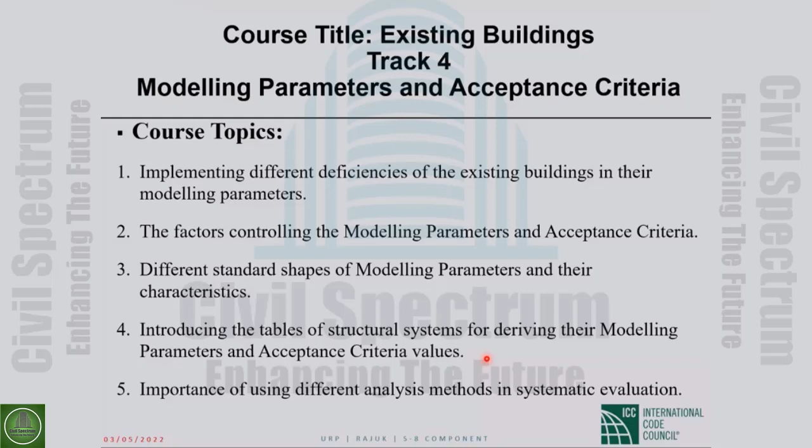Look at this systematic existing building code: performance levels, a chapter on the definition of hazard levels, a chapter on different analysis methods - linear method, nonlinear method - and then they have some chapters on different materials. So all the information regarding the different systems made from that material is usually very nicely summarized in the chapters related to that material.

For example, for concrete - and the same for almost all materials - we have the scope at the beginning, material properties and condition assessment second, and general assumptions and requirements third. So these three are general things.

And then we go to the systems, which is, for example, here, concrete moment frame is a system, precast concrete frame is a system, concrete frames with infills are a system, concrete structural walls and precast concrete structural walls, concrete braced frames, and then some elements: cast-in-place concrete diaphragms, precast concrete diaphragms, and concrete foundations.

Therefore, as a sample, we look at the structure of the concrete section. In the first part, the scope part, it naturally tells us some general statements about the area covered by this section, by this chapter. For example, it cautions us that this chapter is not for reinforced concrete buildings damaged in an earthquake - it's for existing buildings that have not experienced, or have very small, not lots of, damage from earthquake.

If we want to evaluate a damaged building, the procedure should be somehow different. So in scope, it emphasizes under what conditions we can use the requirements of this chapter for our existing building.

Then the second part in each chapter is material properties and condition assessment, which is really the most important, the most difficult, the most time-consuming part in each retrofitting and evaluation project. It's finding the material properties and condition assessment of the building to determine the configuration of the elements and materials. That's naturally very time-consuming, needing lots of permission, lots of arrangements.

After this second part, one of the most important parts of this is the test, especially material testing, in buildings. Many property managers don't let you do the test because it just damages their property. So the existing building codes sometimes let you use the information in the existing drawings or documents. In many existing building codes, there are also default values, so whenever you can use that option of not doing the test, you can use those values. But the only point is...

In systematic evaluation of buildings, we need two numbers for the strength of the material, F prime C, Fy. We need two numbers: one is the expected value, one is the lower bound. When we want to use material properties to calculate the strength of force-controlled elements, we are a little conservative, so we use the lower bound. When calculating the strength of deformation-controlled forces, because it's less scary, we use the expected value, the mean value. Lower bound is mean minus one standard deviation.

Therefore, because sometimes the codes let us use the values in existing drawings or documents, they should give us a factor so we can use those numbers as lower bound and increase them by this factor to get the expected values. So, for example, for concrete compressive strength, if they let us use the value in the documents as a lower bound, multiplying by 1.5 becomes the expected value.

So, finding the condition, finding the configuration, finding the dimensions of elements are very important. Material is very important, but also the condition, configuration, and dimensions of elements are very important too, because otherwise we are not sure that the computer model we have is correct. Therefore it's important that we check the dimensions of the beams, columns, the condition and the dimensions of the elements.

The condition check usually covers whether the concrete is good or not, and using non-destructive testing to find the location of the reinforcement, especially if we have some drawings, we can cross-check this with checking in the site, with non-destructive checking in the site. And if some of the points where non-destructive testing is done are insufficient, then we uncover the element and see if the accuracy of the work is good enough or not.

Usually on site, the importance of an experienced operator, his experience or her experience, is much more important than the equipment they are using. Sometimes you see that an experienced operator with old equipment does very good estimation, but sometimes a less experienced operator with very nice up-to-date equipment gives you wrong information. So checking them by uncovering some places is very important.

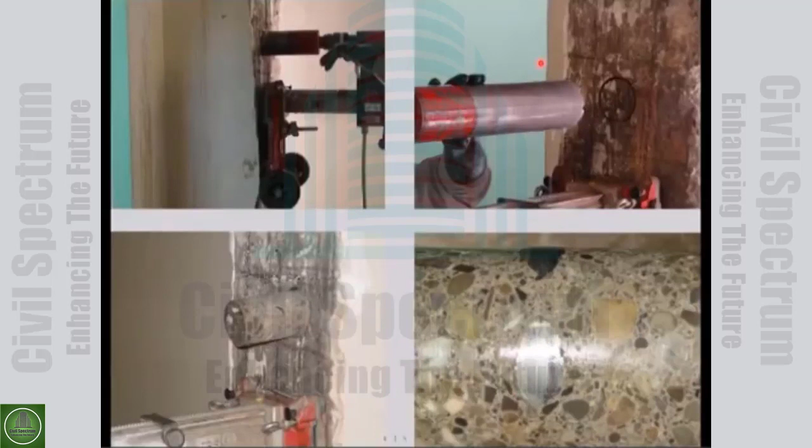If, for example, the equipment is vibrating, or the cutter blade is not sharp enough, the sample gets lots of small cracks that are not visible. When we test this, we get lower values for the concrete, and we use these lower values in our structural and building model, and the building becomes vulnerable—which maybe it isn't, because the way we derived the material properties was not good, and the real strength is much more than what we get after all this effort and permission arrangement. Then the result is misleading instead of helping us give a good estimation of the building's condition.

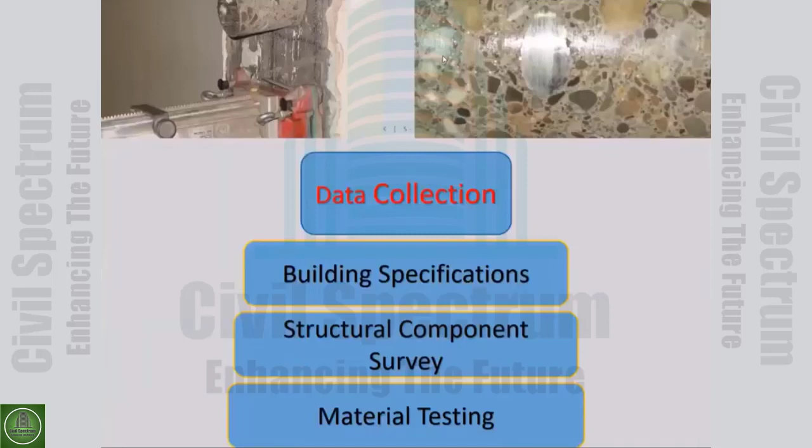So we should be very careful to do these procedures carefully and get good results. Otherwise, it's just a waste of time and money. Usually we pass over data collection very quickly, but in reality data collection is the most difficult and most time-consuming part of a systematic evaluation.

What is the configuration of the building? What irregularities does it have? What are the dimensions of the buildings and of the elements? What is the condition of the elements? What are the soil properties? Gathering this information is the most important thing, and is the most valuable contribution our engineers can make for the buildings.

Because right now we are supervising construction, we are designing buildings, so we should make sure that the end results, the drawings, reflect all the changes that go into the construction. The drawings should really be as-built drawings.

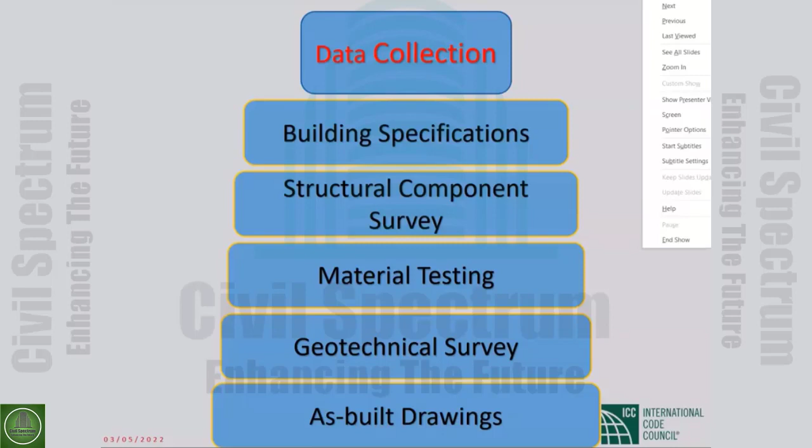And when we did all this, based on that table that I showed, we will find out the value of the knowledge factor. The knowledge factor value will be applied only to the existing material properties, not to the new materials. So when we evaluate a building, if we add some elements during the retrofitting stage, those are new material, and the original material in the elements of the building is the existing material.

When we model the building, the original building plus the elements that are newly added, we should remember that kappa, the knowledge factor, will be applied based on whether we use nonlinear or linear procedures for the strength or deformation capacity of the existing material.

For example, in linear procedures, we're dealing with forces. Even in the deformation control, the linear method can give us the deformation, the plastic deformation.

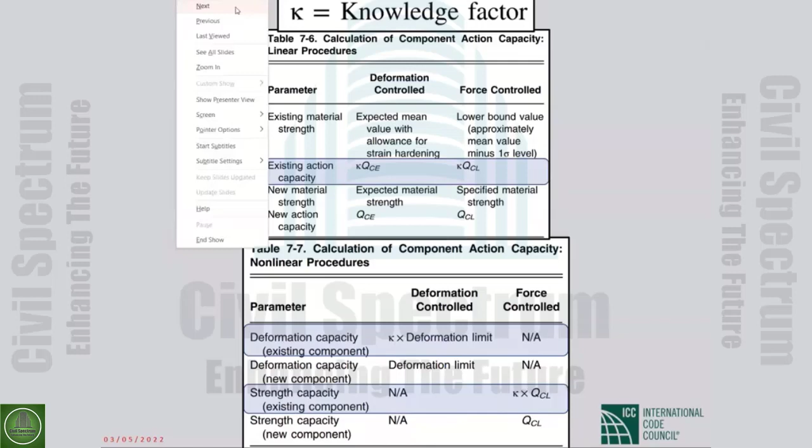Therefore, we are looking at the structure of the concrete chapter. In scope, it tells us when we can use the requirements in this chapter—it's not for damaged buildings, it's for existing buildings.

Part 2 is the most important part. We quickly pass through it, but in reality, in the project, it is the most important part. Then the last part is the general requirements, because after these general requirements, we go to the systems and to the elements.

In the last part of the general requirements, we are looking at some requirements that can be used in most of the systems and most of the elements. So we bring them out and talk about them once, to reduce the number of repetitions.

For example, the table for effective stiffness—because concrete elements, even in their linear range, get cracked and their stiffness changes. So we use effective stiffness. We don't assume that this part is nonlinear.

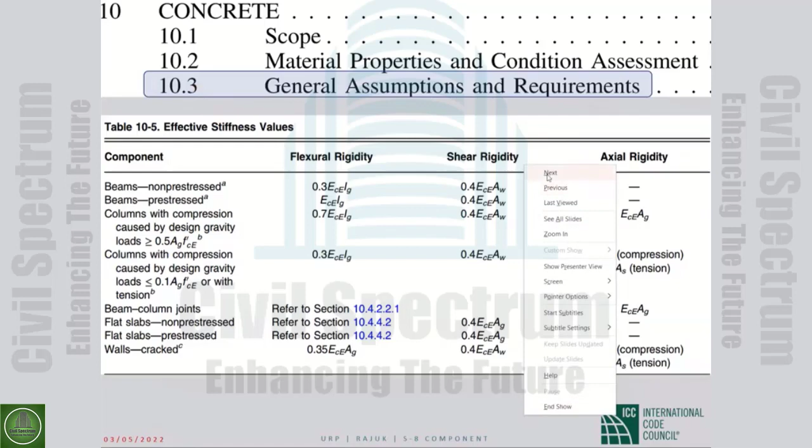Another very important thing given here is the effect of deficiencies, which is one of the most important things in this general assumptions and requirements section—some of the deficiencies, and how we should model them.

In a new building, if the hook bars, lap splice bars, or straight bars don't meet the development requirements, they should be demolished, and we should make a good element with good straight bars, hook bars, and lap splices that do meet the code requirements.

But for existing buildings, all of them have problems. We should model them—we should bring them into the modeling. A few locations we consider, for example, this deficiency: when in our existing buildings the straight bars' lap splice is not enough, or their hook bars are not, for example, the shape that is needed.

So what we should do, for example, is modify the yield reinforcement. If instead of this amount of development length you have a lesser development length, we use this ratio, not linearly. In the first version of this code it was linear, but later with more data they modified it with this type of equation. So based on what we have versus what we should have, how far we are from the optimum approach, we reduce the value of the yield.

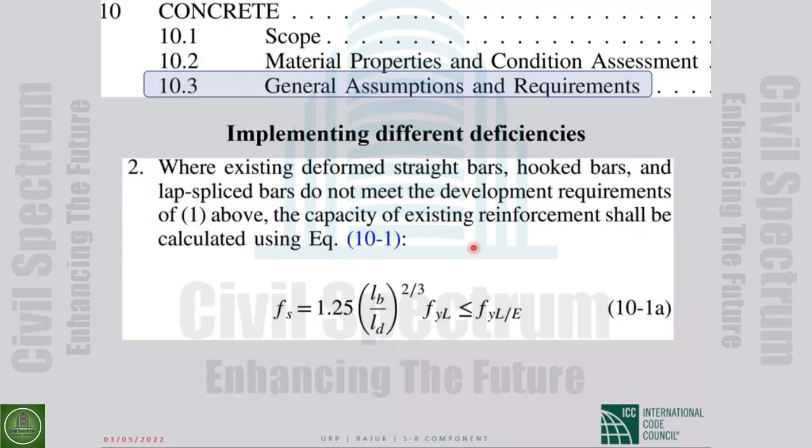So in the general assumption and requirement of the material sections, they teach us how to include this deficiency, specific material issues, how to include them in the modeling. This effect, we will see later in the tables, for example beams controlled by inadequate development or splicing.

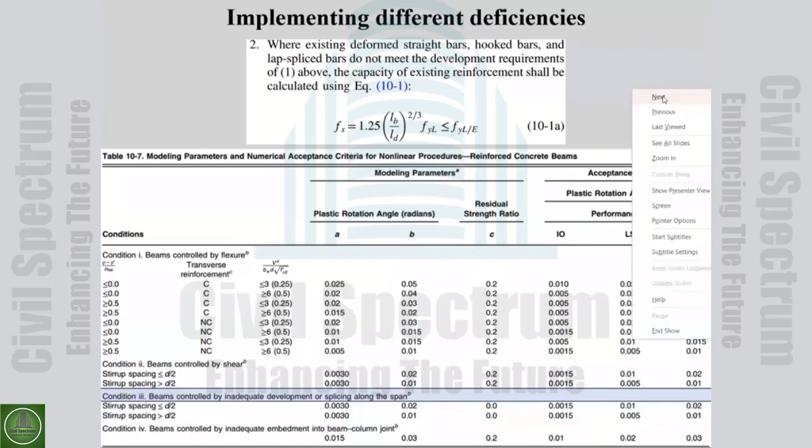What else do we have in this part related to deficiency? Still we are in 10.3, general assumption and requirement. In that part I've selected a few topics to give you general information that is provided there. They try to give us some means, some tools to differentiate between critical and less critical parameters.

As I said, we are in the comprehensive evaluation, and we want our approach to become complex. We are introducing new indices, so we want to differentiate between two points, because if we assume these two are the same, we should use the lower value for both, and that becomes our estimate. We want to, as much as possible, differentiate: make it difficult, make the retrofitting cheaper, make the modeling and analysis difficult for the structural engineer dealing with seismic retrofitting, but make the cost of retrofitting and disturbance of applying retrofitting as small as possible.

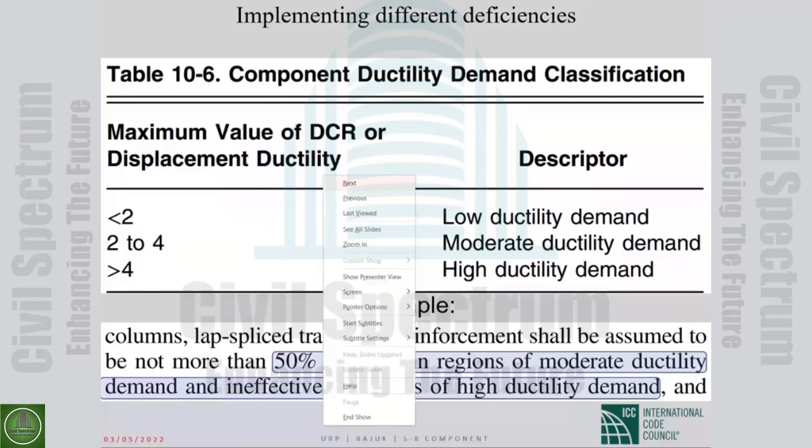What else? So we have some general items at the beginning, like scope, material, general assumptions—very important. Then we have systems, and then we have elements. For systems and elements, our approach is the same if we look at all of them and divide the situation.

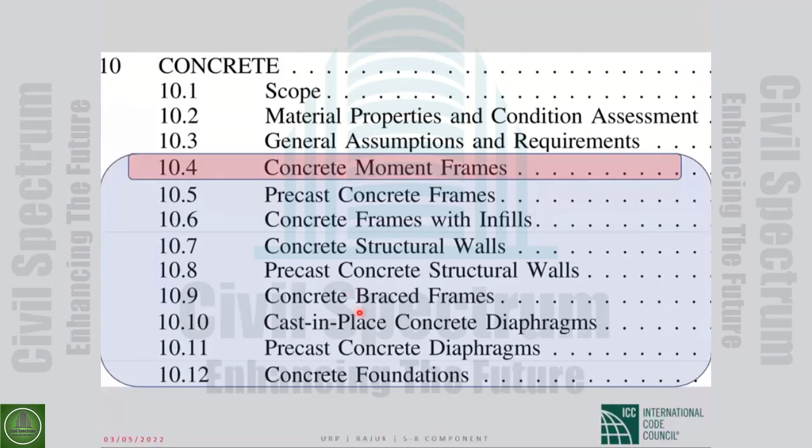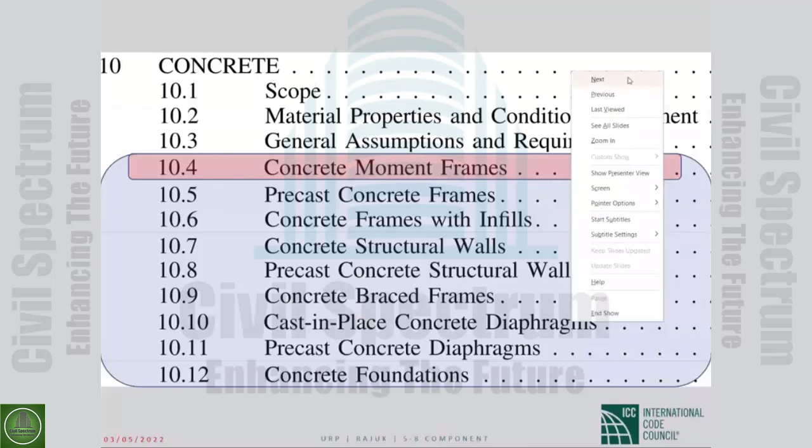For example, look at section 10.4, concrete moment frames. If you look more carefully, this section has subsections. For concrete moment frames, as one of those many systems, the material is very systematically distributed across these sections. There's one section that shows the types of concrete moment frames.

For example, reinforced concrete beam column moment frames—usually we consider these as moment frames with beam and column. But sometimes there is no beam, just a slab-column moment frame. And sometimes the beam is post-tensioned or pre-tensioned, giving us post-tension concrete beam column moment frames. So these are the three: reinforced concrete beam column moment frame, post-tension concrete beam column moment frame, and slab column moment frame.

Each of the systems or elements—for example reinforced concrete beam column moment frame—always has 5 categories of information in this seismic existing building code. You can always find 5, but one of them is very important; the others are not as important. So we have 5 pieces of information.

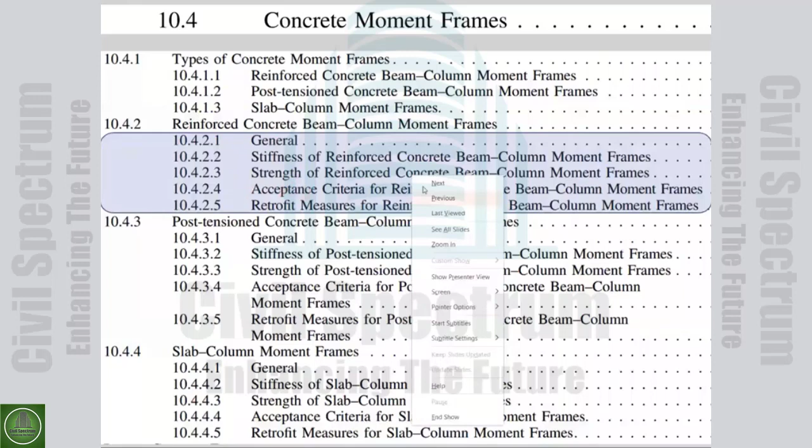And as I mentioned, the title of today's presentation highlights the most important part: the acceptance criteria and modeling parameters. For example, here—you've seen this table many times—it gives you everything needed for modeling and acceptance.

So powerful is this tool that now, as I mentioned, many structural engineers say that we don't need any new design code anymore. We go and build whatever we want, whatever we can. If there are some deficiency, we model it, and then we show that it passes those performance levels. But there is strong resistance to that.

Because the experienced generation of code writers believe that we can miss many things in modeling, in calculation of the level of loads, in calculation of the behavior. There are some unreliabilities, so it's better that we use the experience, use the prescriptive approach, keep the prescriptive articles in the code, keep the empirical approaches, try to use them as much as possible, but complement them with these. So most probably we will still have our prescriptive articles in the code, at least for a while.

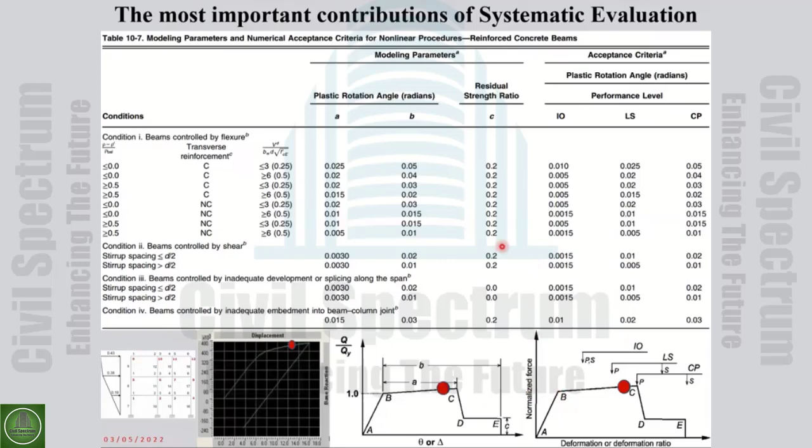Then applying this in the software becomes very easy. Usually the software asks us, what are your deformation control elements? We say it's a frame, so the beams and columns can get damaged. Or it's a bracing system, so the axial force in the braces can damage the fuse - the deformation control is the braces. Or it's an eccentric brace system, so the shear in the link beam is the deformation control parameter. So we select the kind of points that our software should look at for damage at that point.

So we select the templates, this is a moment resisting frame. In the beams, at the end of the beams is a location that can get damaged. We look at the deformation capacity and give the property of that spring, that nonlinear behavior at the end of the beam, which is the modeling property.

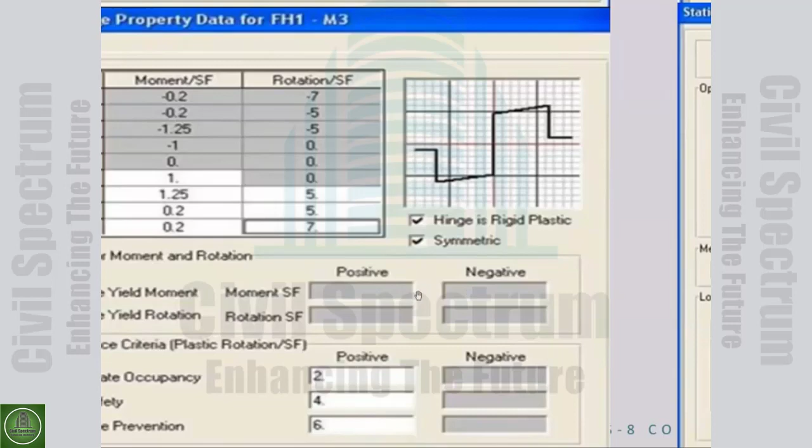So then in modeling, either we trust the software or we check and change the properties to be sure it applies according to our tables. Then we say that we want this building to be pushed to this target displacement with this lateral load distribution, with this many steps. If there was some problem in convergence, we increase the number of steps so the numerical stability can be guaranteed.

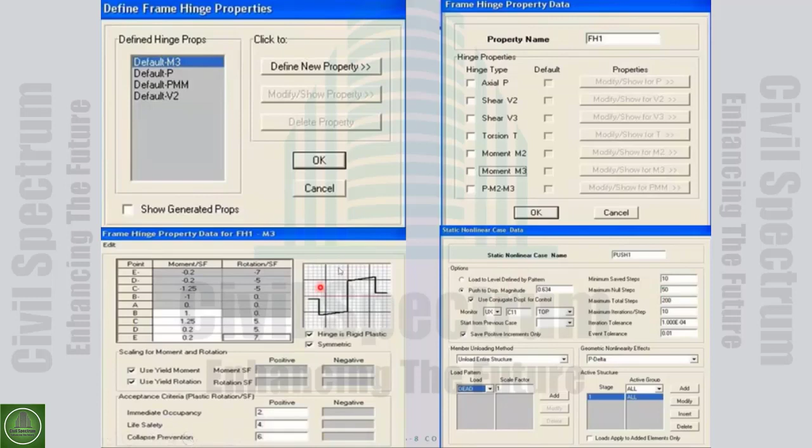As we saw, the software tries to push the building to that target displacement that you assign. In each step, it gives us the situation of all the deformation control parameters: how many of them are in the linear range, how many pass a little into the nonlinear range, past point B but still not in the IO range, how many are in this range.

At each stage, each target displacement is more, but for each displacement we can calculate what SA is that makes this much displacement, and we can say this corresponds to a 100-year return period earthquake. This is 200, this is 300, this is 400. And we see, as the level of earthquake increases, how the damage is distributed among the deformation control parameters in the building.

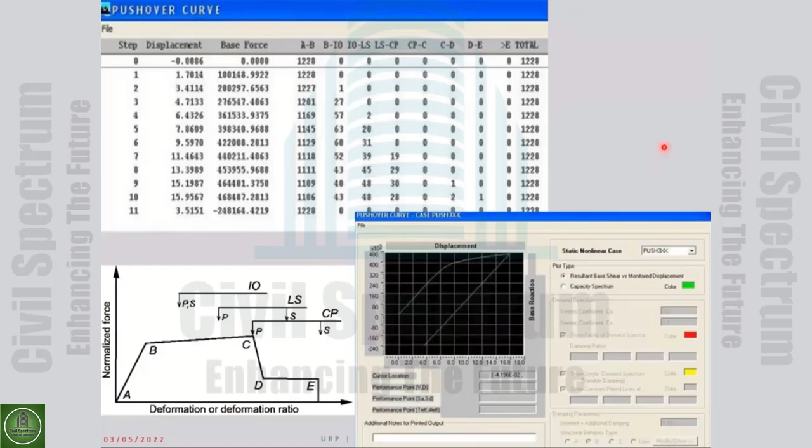So, these softwares provide a very good visual view of our design, so that the distribution of damages along the different bays and different stories can be seen very easily over here.

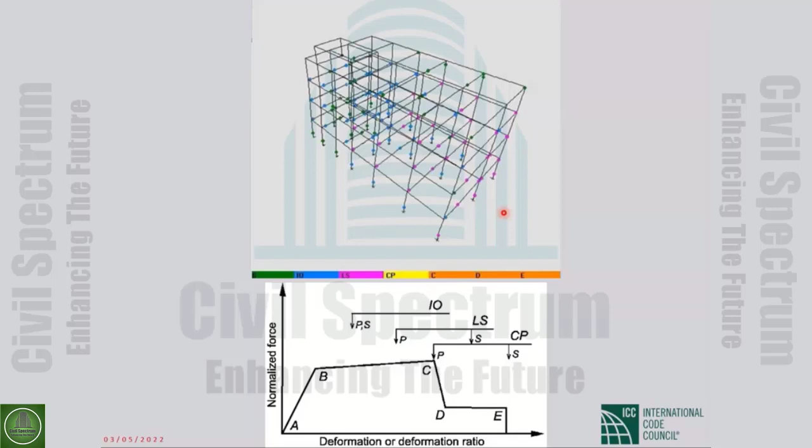Now, if we want to apply this in real life buildings, if one as a structural engineer wants to perform systematic evaluation on a building - because even in design of new buildings there are different approaches we can use, but the principles for existing buildings are a little different from new buildings - to make my point I try to find the simplest possible example. We have different methods for analysis: linear static, linear dynamic, nonlinear static, nonlinear dynamic.

So at least we have 4 types of analysis. Usually in new buildings, when we design, we shouldn't expect that much difference between these, because we scale. If we use one approach or another, there are some scaling changes, so they are not much different. But in the evaluation of an existing building, that's very critical.

So I want to reach this point: for systematic evaluation there are lots of ways to evaluate a building, but our view for selecting a company or person to do the seismic evaluation should be quite different from how we select a company or person to do a design for a new building. Usually in new building design, we select a person or company that asks for less money, because the procedure to be followed is almost straightforward, the steps are easier. But for the existing building it's quite different.

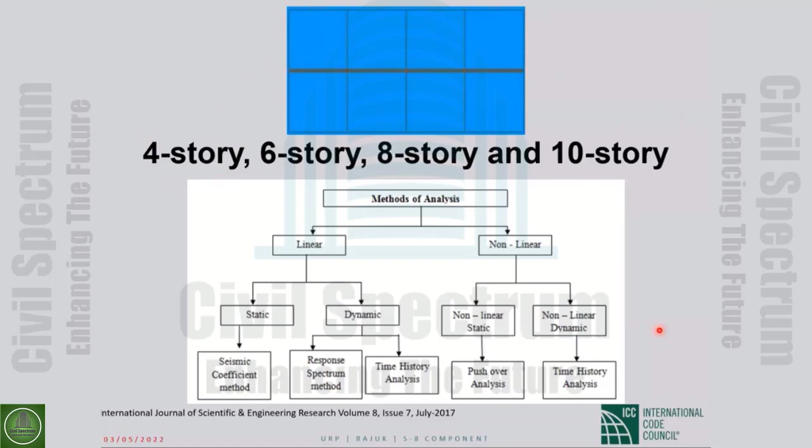Many times results like this that we solve from this example show beams and columns, number of elements in need of retrofit. We use a method, and this method says 50% of the beams need retrofit, half of the beams. We change the method, it says 25%. We change the method, it's 0. 50%, 0.

So the first lesson that we learn is that in seismic retrofitting for a specific building, if you apply the seismic retrofitting for a group of buildings, you should make a methodology and use that for all the buildings. But for one specific building, you should try all the available analysis methods, because one of them tells you that 50% of the beams need retrofitting, one says 0.

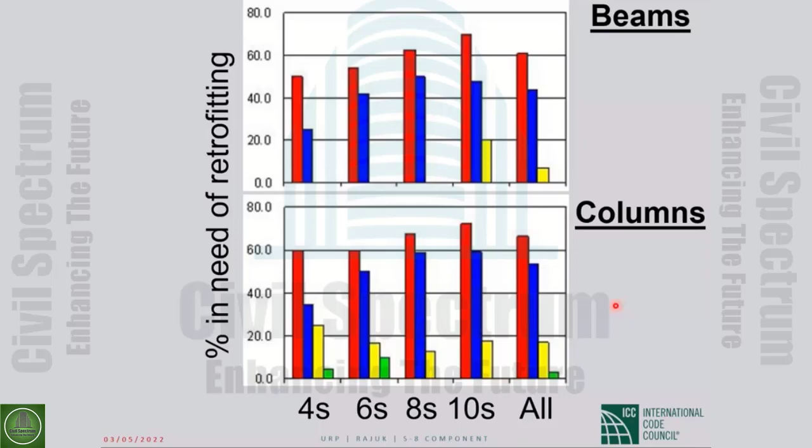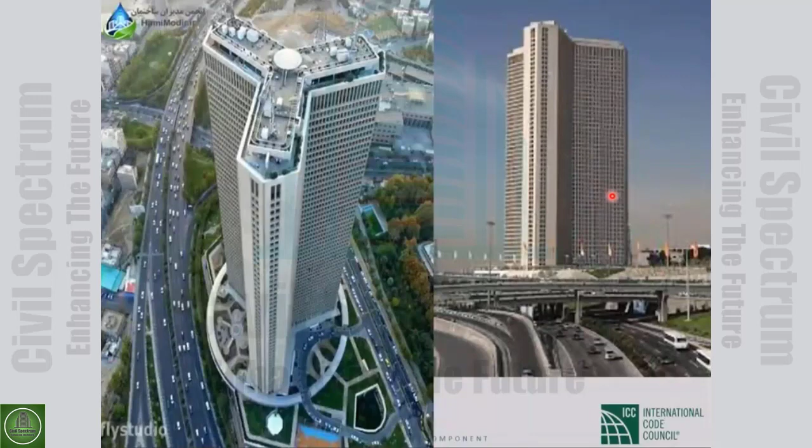Let's go from this simplest possible example to the largest ever. This is the case of seismic evaluation and retrofitting of a 56-story building complex in Tehran, Iran. At the time it was under seismic evaluation, it was the largest evaluation project in history and in the world, I don't know if that status has changed since. It's around more than 15 years ago, but at the time it was the largest retrofitting project in the world, a 56-story building with a long story, that's why it went through the retrofit.

So here, the same story again. If we look at the results of the linear analysis, these kinds of buildings are shaped like a star. They are very nice buildings because the ratio of the perimeter to the area is more than other shapes, so the apartments can have lots of view along the perimeter. But from the structural point of view, because the main walls intersect here, they have a little problem with torsion, that these lateral walls of apartments should handle.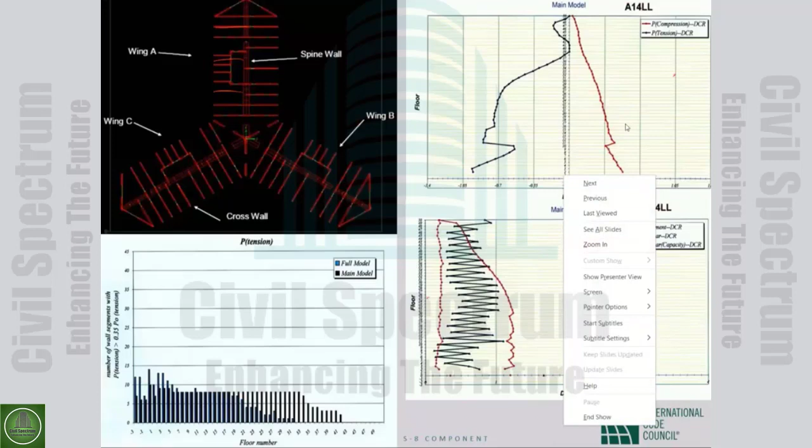Here, assume everything more than this needs retrofitting. For example, this wall in wing A, from this floor to this floor, almost floor 26, 27, needs retrofitting.

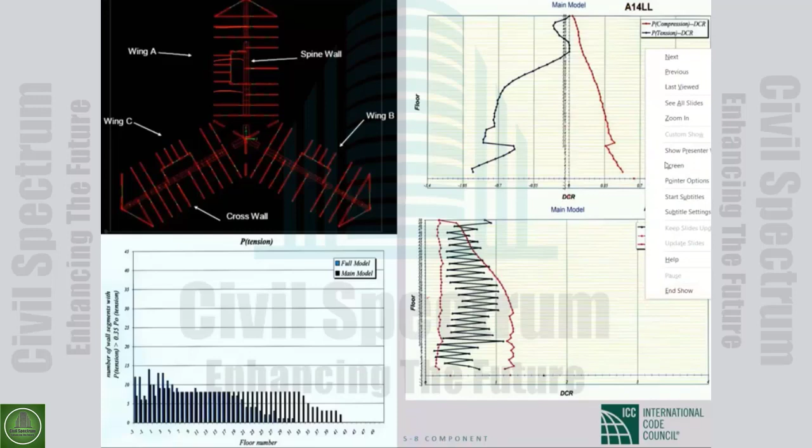I think that's maybe the first real building that used RAM Perform for a project. The Perform software now is CSI Perform, but when it came out, Professor Powell of Berkeley, when he retired, worked with the RAM company to produce Perform, and it was used for the analysis. Lots of problems, and needed solving some of the problems to be run. Anyhow, lots of problems, lots of difficulty.

But what's important is that only some of the lintels needed retrofitting for this huge 56-story building, instead of, for 20, 25 story buildings, almost all the walls needing to be retrofit. Huge work. Just a couple of the lintels in the main walls, their beams, those lintels needed to be retrofitted, which is easily done.

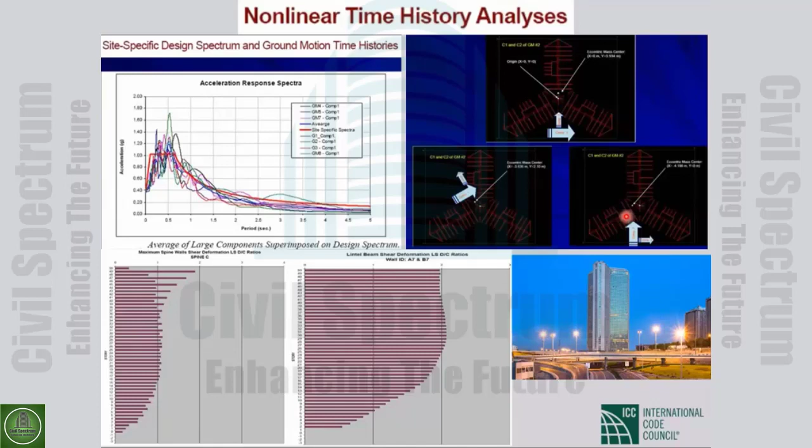So if we look at what we had in these 4 sessions in this course, we covered only some concepts regarding systematic seismic evaluation of existing buildings. This area is very vast, very large. It has seismic evaluation, seismic retrofitting, technique selection and detailing. We didn't say anything about technique selection and detailing.

Even in seismic evaluation, there are methods based on fragility, vulnerability functions, visual screening, rapid vulnerability, preliminary assessments. We talked about some concepts regarding detailed engineering and systematic evaluation, but there is much more here.

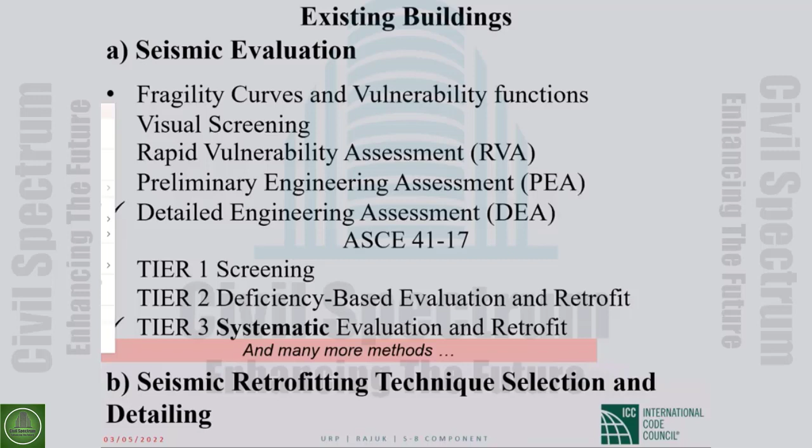So we should know that we focused on some concepts, because mainly it was important for us to differentiate between our approaches to new buildings versus existing buildings. But there are lots of good references, lots of good books. For example, I mainly used this code as a base. There are many other codes that can be used, even for the...

In ASCE 41, now every chapter for materials is getting separated into codes by the relevant corresponding code committees. For example, ACI has the assessment, repair, and rehabilitation of existing concrete structures. AISC has the assessment, repair, and rehabilitation of steel structures. So now it becomes even more technical.

And for the examples that some of our dear colleagues were asking for, there are again many good ones. I selected this one because it's free and easy to download: the examples guide for ASCE 41, a previous version, but with additional commentary for ASCE 41-17, and the one based on 17 seems to be coming out soon.

So there are very good codes, many good ones from different countries. I didn't include ones from New Zealand, Japan, Australia, or the Eurocode.

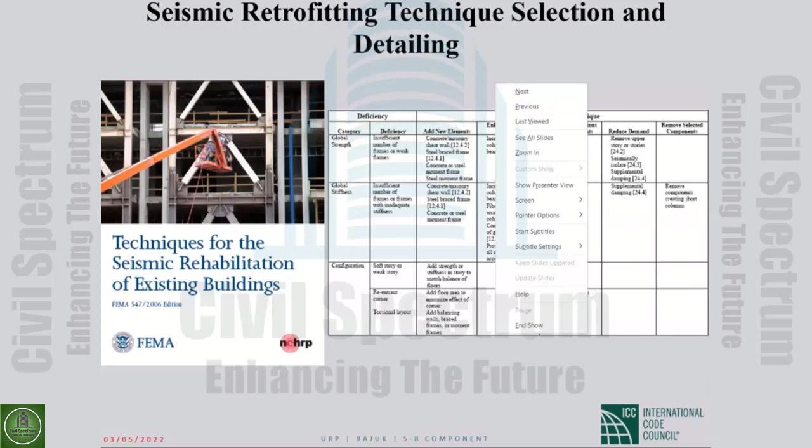When it comes to seismic retrofitting technique selection and detailing, there are very good guides available as a catalog that we go through to find out what the problem of the building is, and try to solve it.

As I mentioned, compared to new design, the evaluation and retrofitting of existing buildings is more complex because it's not straightforward. There are many ways to approach it.

Now we have to reach the accepted performance level. There are many ways. If we can in any way come to this area, it is accepted. So you can increase the stiffness and the strength.

Because of that, your target displacement after yielding reduces. So with increasing strength and stiffness, you can reach safety.

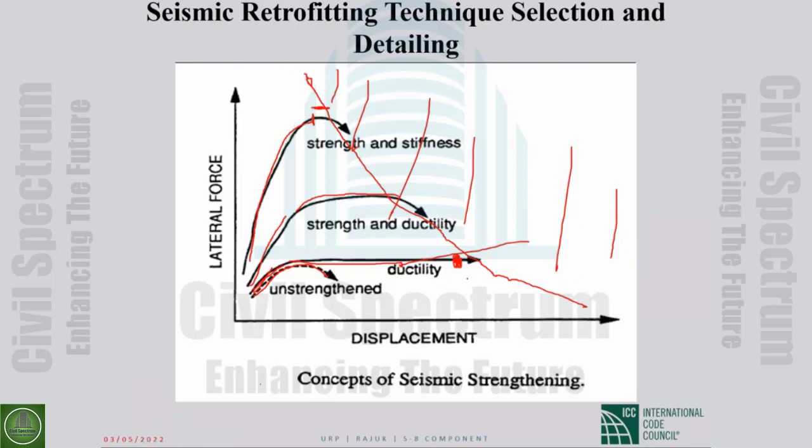Therefore, if we, so for example in that case, assume it's a hospital. For a hospital, there is a problem: this existing structure can't reach the target displacement.

So either we increase the strength and stiffness by adding these new elements, and then reduce the target displacement. Now even that vulnerable element doesn't need to reach this level of displacement, and at this level it is okay.

Or just for that vulnerable element, we don't increase the strength, we don't increase the stiffness of that, just see what happens to it. Why has it a reduced ductility?

So for example, now we need to increase it by adding some cover of concrete, steel coverage, or FRP coverage, just to enhance the stress-strain curve of the concrete and increase the ductility capacity of the section, so it reaches the target displacement.

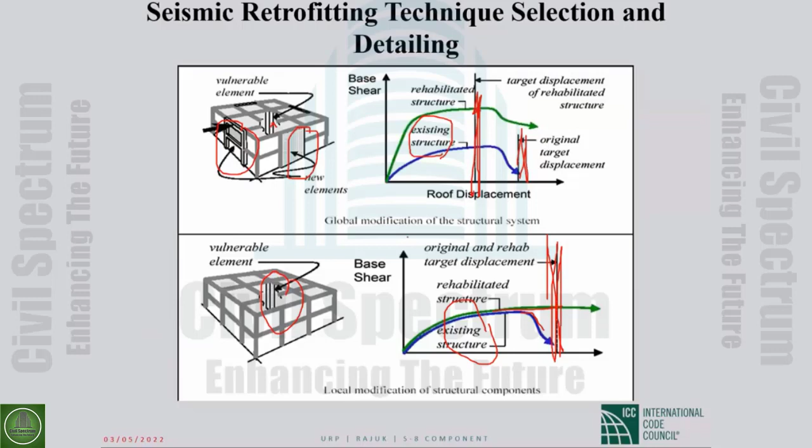Sometimes we want to go inside if it causes less cost for the retrofitting. So depending on the situation, we have different options available.

Then for the selection of systems, many of these approaches are based on experience, as I mentioned in the codes in the commentary part, which give some recommendations. For example, many times retrofitting from outside is easier.

For example, in these cases, you can see that a bracing system is added to the perimeter of these buildings. In some of the facades, it is less, some complete, or just some support from outside.

We know that some systems, such as BRB, these buckling restraint braces, are very good and easy in a way, because the bracing system itself is very good. There's no problem with bracing - the point is that in tension it is very good, but in compression it buckles.

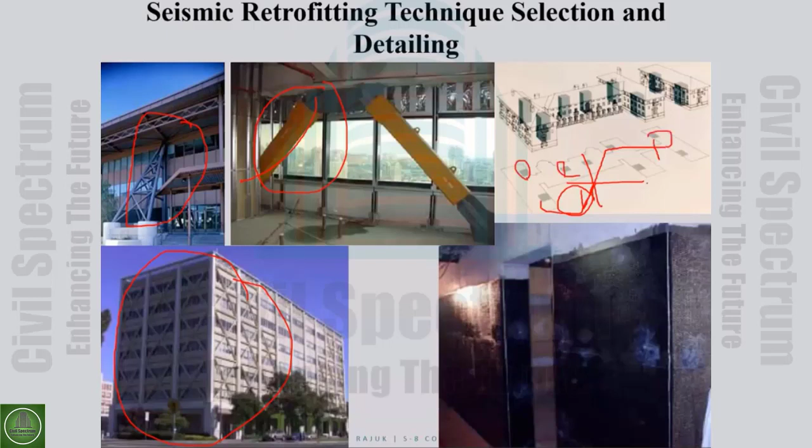Different countries are working very well. For masonry buildings, usually one approach is to design rigid cores along the plan of the building, so a distribution of these rigid cores is very good. And for the local problems in the elements, usually...

techniques such as using FRP now is very good, but should be used very carefully, because in many cases, due to workmanship, due to the material used, there are projects - for example, a very important hospital - where they spent lots of money applying the FRP, but around one year after the application, you go and check the locations, and in many places the FRP has separated from the concrete.

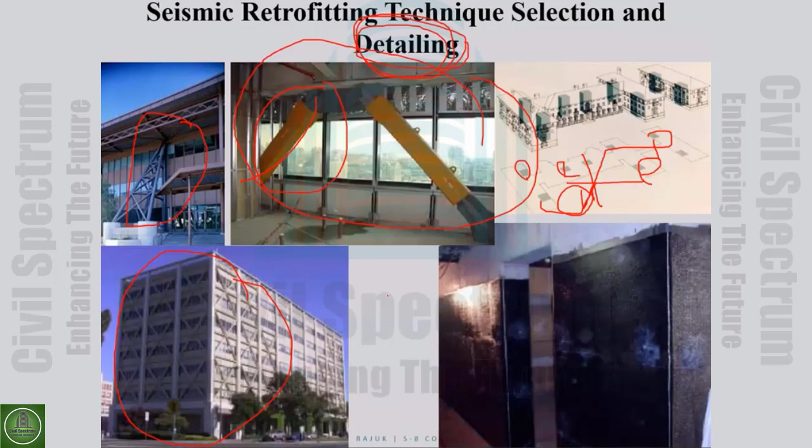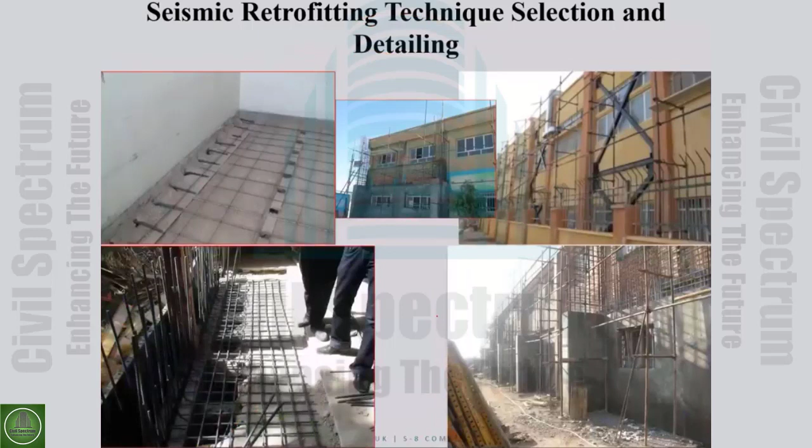So the detailing is very important. When you select the general system, the detailing is as important as the system itself. And the detailing in all systems, complex and simple retrofitting, is important. Because, for example, if you want to retrofit from outside, either by adding bracing, or adding shear walls, or adding frames to the outside of the buildings, then many times, because only the outside is retrofitted, the diaphragm should bring the force to these elements on the outside. So it's better to have a rigid diaphragm.

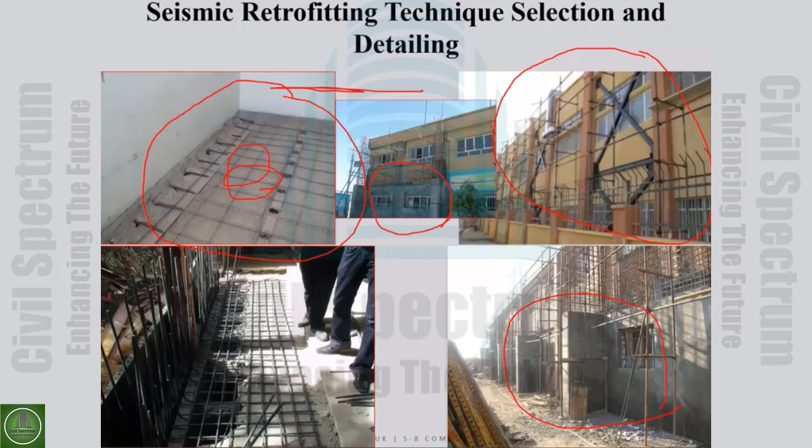Because if it's a flexible diaphragm, the internal elements that are not retrofitted will also get load, depending on the mass distribution of the diaphragm. So it's better to be rigid, and then detailing is important for the building after retrofitting to behave the way that we are assuming. We assume that the load comes to these elements in the perimeter, so there needs to be enough good detailing to make the diaphragm rigid, so the diaphragm can safely transfer all the loads to these elements in the perimeter.

Also, if, for example, we assume there is a shear wall, and in our model in the software, where we put the shear wall, it works very good. Or in the software, in the reinforced concrete building, for example, we put the bracing, and we check, and the software says yes, everything is okay. But in reality, after an earthquake, a couple of cycles, this connection between the brace and the element gets loose, or the brace is not completely straight when it's applied.

Therefore, the building should get deformation, then this brace comes to help and helps resist the load. And because it's a stiff building, first the building damages, then the added element wants to participate.

Or, for example, if the connection between the new shear wall and the diaphragm is not good enough, then the load from the diaphragm cannot transfer to the shear wall. We assume that we design the shear wall to get a good share of the force, but in reality, because of bad detailing, the load can transfer improperly. For example, damage happens in the slab because of the small thickness that the slab has.

Therefore, if we want to review the items in today's talk, because a test is coming up after the course - one of the important things was this systematic assessment and retrofitting. What was the main contribution? Is it, for example, introducing new retrofitting techniques, advanced techniques, FRP, shape memory alloys, base isolation, new forms of damping, repairable systems, many new ideas?

No. The most important aspect of systematic assessment and retrofitting is introducing modeling parameters and acceptance criteria that let us model each building with whatever deficiencies it has and check its performance. So these modeling parameters and acceptance criteria are the very important contribution of this generation of systematic evaluation of existing buildings.

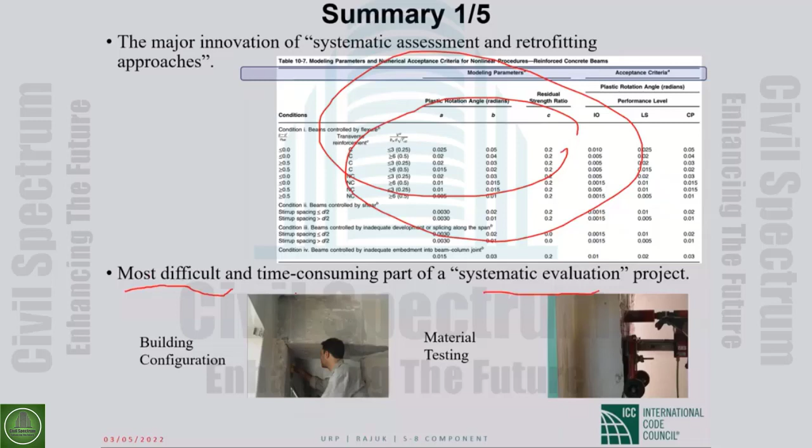What part of the systematic evaluation is more difficult, more time consuming, is finding the building configuration and testing, finding the material properties and characteristics. So from now on, at least for our new buildings, we can make good documentation - the authorities can make sure that all detailed drawings are as-built. This will be a big help later when we want to evaluate, because new codes come, the seismicity of the city changes, a couple of new faults are discovered. So the most difficult, time-consuming part is finding the building configuration and the material testing. It's very, very difficult.

I ask, many of you had this experience. What is the approach in the systematic retrofitting and evaluation toward the deficient elements?

In our design of new buildings, construction of new buildings, our approach is very clear. You should demolish and rebuild. We don't accept any major deficiency in the building. It should be according to the design.

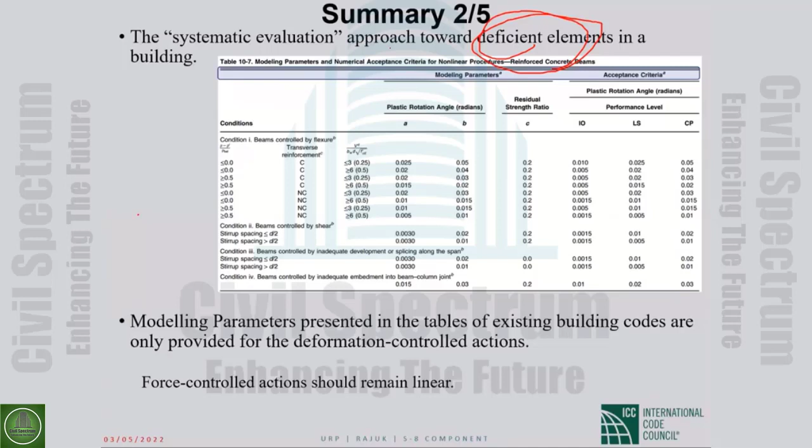But our approach in systematic evaluation is to model the deficiencies. So all the deficiencies are modeled by modeling parameters, and their effects are considered in acceptance criteria. The acceptance criteria for, for example, inadequate development is different from the one with adequate development. Maybe it's 1/10 or 1/5 of that. So it's quite different. The effect of deficiency is shown in modeling and in acceptance criteria.

There are modeling parameters in the tables, such as the one we can see above. Why are they only for deformation control actions? Because force control actions don't need tables. They shouldn't get damaged, so there's no need for the level of damage as an acceptance criteria for modeling the nonlinear behavior. So there is no table for force control. Force control action should remain linear.

Then, if the major contributions are modeling parameter and acceptance criteria, what is modeling parameter in simple talk? This A, B, C - what can we call them? This shows the modeling parameter, shows the nonlinear capacity of a deformation control action. For example, here is bending, so nonlinear capacity of bending is a modeling parameter. A, B, C shows this capacity.

This is capacity. Demand can be small, demand can be more, demand can be different. What is capacity? The capacity to damage without deterioration, the capacity of damage with deterioration. So these are capacities.

What is acceptance criteria then? If this is the capacity, this is the limit for performance - limit of damage for performance, limit of performance on the deformation control action - these are acceptance criteria. So up to this limit, this much damage is IO. Limit of performance: how much damage is LS? How much damage is IO? How much damage is CP?

So acceptance criteria - if they are larger or smaller, what engineering sense should we have? If the modeling parameters are larger or smaller, this A value - if it's larger or smaller, what feeling should we get toward this deformation control parameter? If A is more, ductile behavior is more. If A is less, we can see there are problems with confinement and shear, and the ductility is such that it's less, A is less. More, it will be more. So modeling parameters give us a sense of the capacity, ductility capacity, ductile behavior of the element.

More ductile - how about acceptance criteria? If they are larger or smaller, what sense do we get there? For example, this value, if it's more or less, what happens? If it is more - life safety is here - if the limit is more, the probability of passing that is less... the probability of satisfying that is more. Because if the limit is more, you need more demand to pass that limit. More chance of satisfying the performance limit, more chance of satisfying life safety if the acceptance criteria for life safety is more.

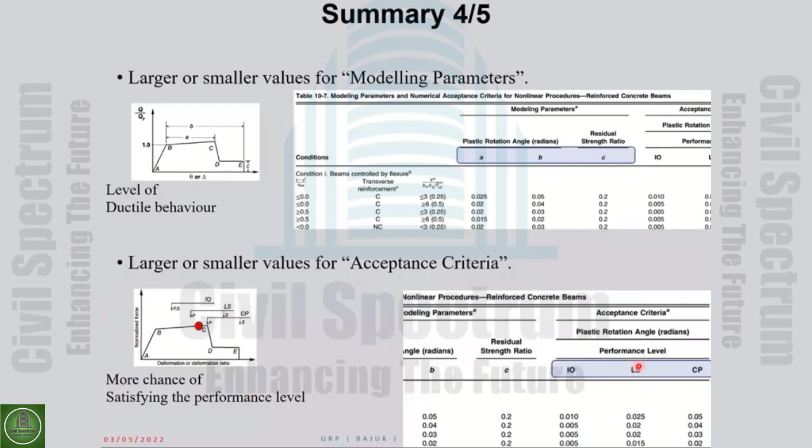Then, what is the main usage of non-destructive tests? As I mentioned, there are almost no codes - sometimes in some guidelines they allow it - but generally you can't find codes for systematic evaluation of existing buildings that allow non-destructive tests. Their estimation we use for strength estimation of the material. They are used just for consistency, for uniformity of the material, to check that the material all over the buildings is more or less the same, or at least find out which elements have the same material.

For example, Schmidt Hammer really measures the surface hardness. Of course, surface hardness of concrete has a relation to the strength of concrete, but it's not a one-to-one relationship. So there's a possibility that the value is overestimated or underestimated. Therefore, the value itself is not important for us - we want to check where the values are similar. We say that the concrete of this location is probably cast at the same time, so these are almost the same material. If we want to arrange for testing of the material, we select a few samples from this portion of the building.

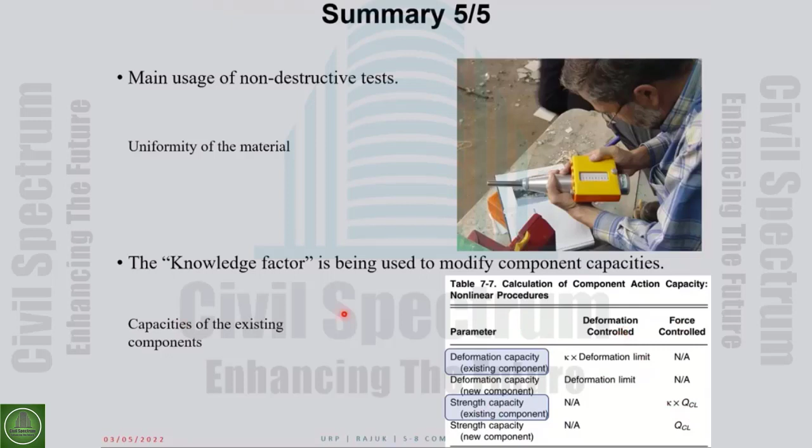If we look at some of the outcomes, the level of deficiency is somehow included in the modeling. We saw that both can change material properties - for example, Fy when the lap splice is not enough - and this also changes the modeling and acceptance criteria, which are provided in tables for each system.

We understood this with the simple example of the one frame, and then the larger building, which was at the time the largest evaluation project in the world. Both examples show us the same thing: that in systematic retrofitting, one focus should be to use as many analytical approaches as possible for that specific building we want to check for retrofitting.